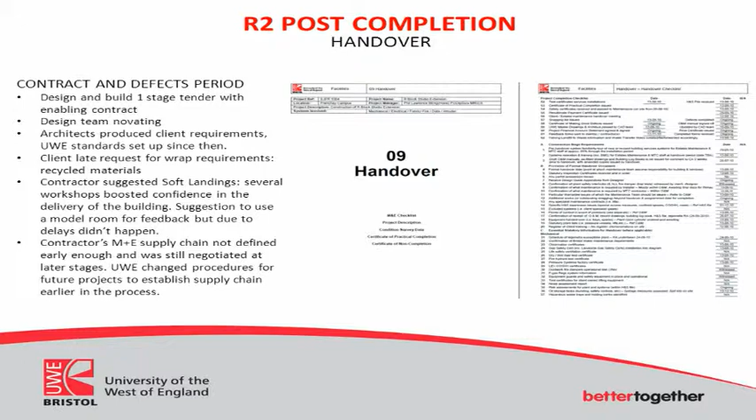It's safe to say the contractor and the consultants were asking us quite early on what we required. We have documentation about what we require generally, but there were gaps. They asked us quite early about what our O&M structure should be, and we weren't able to tell them then. Even at the end of the project, due to various processes, we weren't in a position to resolve that.

So these are things we've recognised as a client that we've needed to raise our game to aid the process. Building documentation - unfortunately that picture is of our cupboard where we keep our O&M manuals. Not particularly proud of that, and I've since got one of our girls to relabel and reorganise it all. But it really demonstrates the difficulty of maintaining paper-based O&M manuals.

An issue we have is we don't have O&M manuals for a building wide, we have it project by project. What we're hoping is that with BIM we can get more towards a building O&M, and then the contract O&Ms update the main building O&Ms.

So the reality is we've got electronic versions of all our O&Ms, which are probably more reliable than our paper copies. But at an estate of this size, it's very hard to maintain and control your O&M manuals.

Andrew explained that this building was designed through a Revit model, and on completion date we received that model. That model has been sitting since 2010 on the S drive, and only now are we starting to see the benefit of having these models for the estate's portfolio.

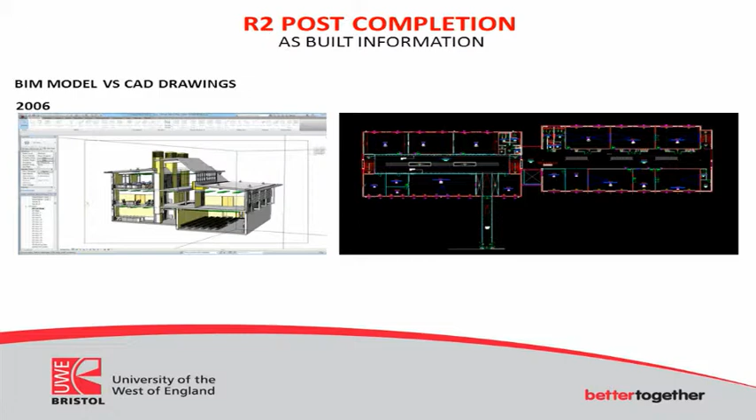I'm showing here an image of the current model that we hold, but all the operations and maintenance is done through CAD - all the CAD information is exported from the model, and what we currently use is CAD drawings.

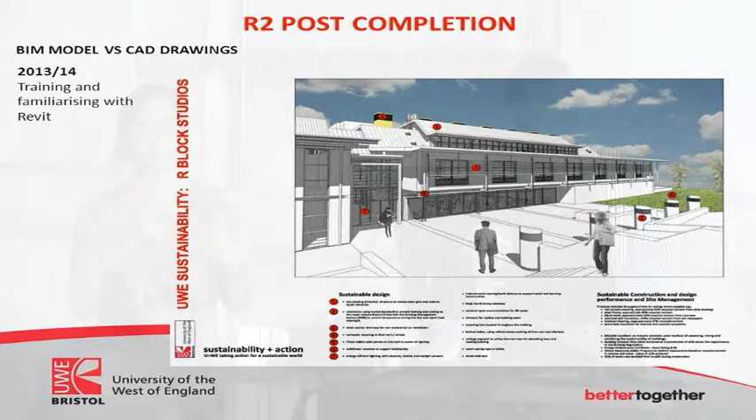Other uses we've given to the model are to create 3D images to help either on education or for the sustainability group, creating posters for students to know about the sustainable features the building has.

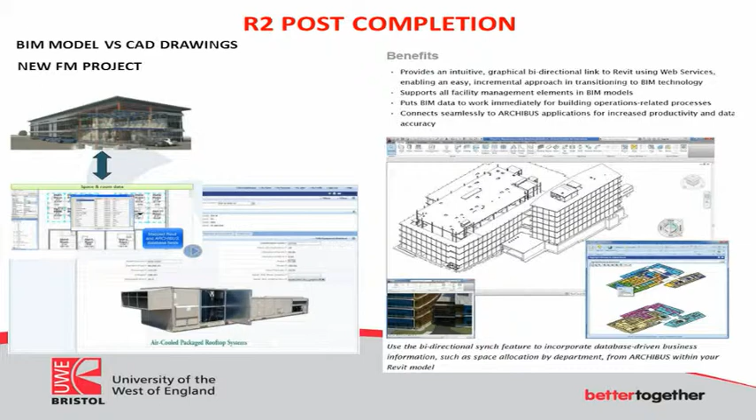In the future, we're planning to run a new FM system that is capable of linking to BIM models. The idea is that this FM system can bidirectionally link to the model and have the data sitting within it, managed from either the FM side or from the model.

So that's something we're exploring at the moment, trying to get to a position where when we receive a new model for a new building, we're able on day one to receive the key, all the documentation, and have the model connected on day one to the FM system.

Now, energy performance. Hi everyone, thank you Simon. For those who don't know me, my name's Fabia and I'm the energy manager here at UWE.

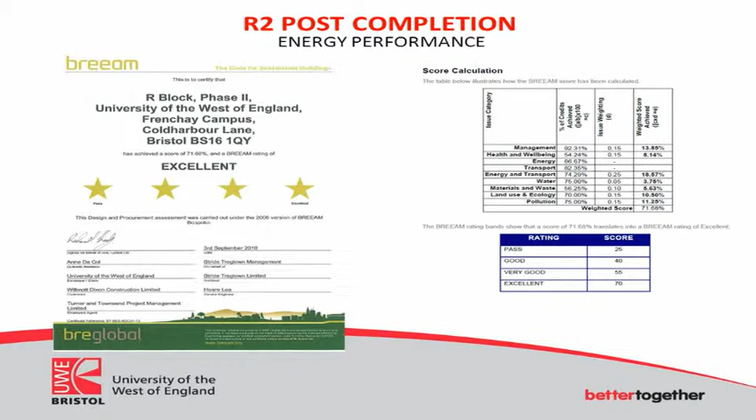So what I've got here are a couple of slides on how the building's actually performing in terms of energy. As Andrew said, we got the BREEAM excellent rating - there's that certificate on display for students and staff to see what rating we got, and the breakdown of the different areas we were awarded it in.

But for me, the most interesting bit in terms of energy is how did our EPC - the Energy Performance Certificate, which gave it a B rating - perform in practice, and what's our DEC rating, the Display Energy Certificate. If that's new to anyone, typically I'd expect my DEC rating to go up, meaning we get a worse performing building in reality than what we predicted.

For the last 3 years, since it's been built, we've had a DEC rating of B and 35. So that's actually achieving what the EPC rating is. I don't know how you've done it, but it's actually gone against the grain in some ways.

The interesting and challenging bit from the energy manager's point of view is to work out not just that it's working fine and we can forget about it, but how else can we improve it and fine-tune it. Because even though this building is working well in terms of energy, there are still some issues we need to unpick and resolve, because it could be working so much better.

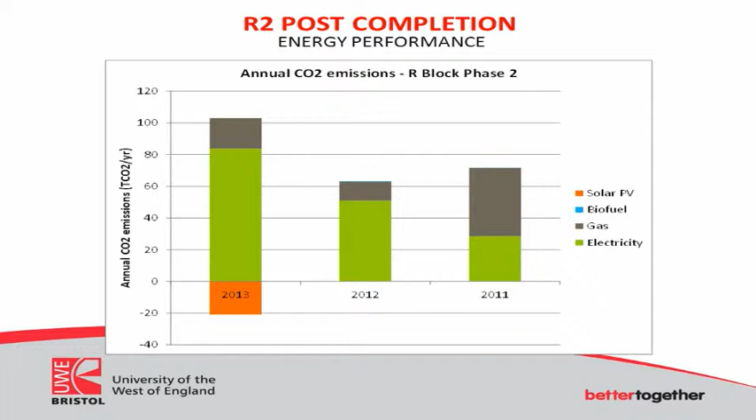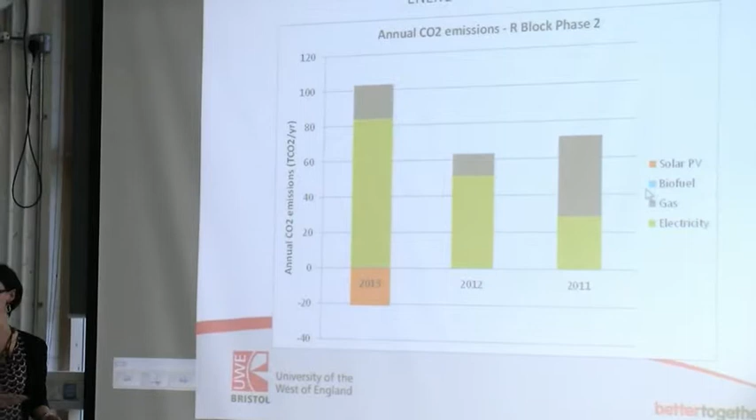That's really all I've done to adjust it. So what we can see is that our gas, the grey bit, goes up if we're having issues with our biofuel boiler. You can barely see it, but there's a little sliver of our biofuel boiler there. When that starts working, our gas demand obviously goes down. So that's a really good one for us - when the biofuel boiler is working well, it means we're not using the gas.

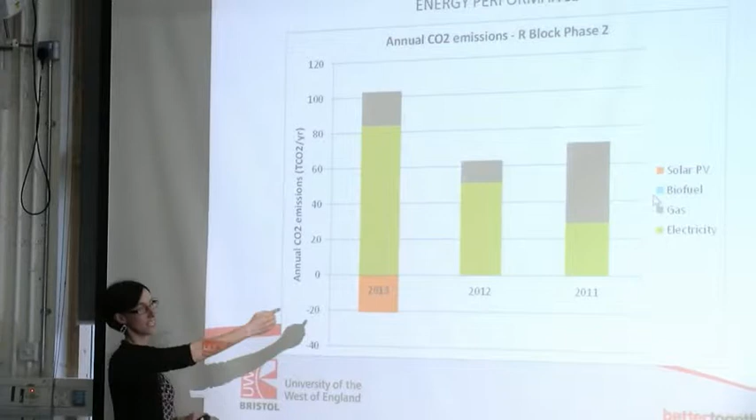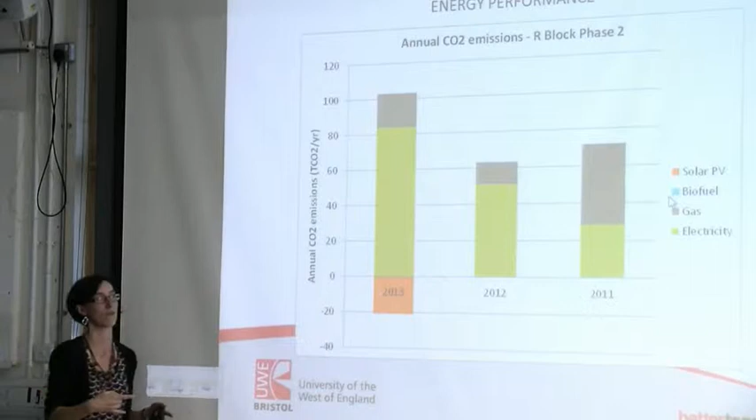The one which is slightly worrying in my mind is the electricity. You can see year on year from when it was built to just last year, we're increasing our electricity use. This chunk here is the amount of electricity we get from our solar PV, so the total electricity we consume in our block is the green plus the orange.

This is one level of understanding the energy use: electricity, gas, biofuel, and the solar PV. We can see how the energy goes into the building. But if I'm trying to understand how it's actually used in the building in terms of lighting, cooling, PCs, that's when we need a better level of sub-metering.

We've got the sub-meters actually in the building, but what we haven't got is them connected onto our AMR system, so they're not being logged. That's a lesson we've now learned - we need to start designing that element into the actual project, so the moment it's being designed and built, we connect it into the AMR system. It's got the capability of giving me more transparency on how the building uses energy, but at the moment we don't use that.

BIM is one way that, in my mind, in the future could help us start to join those gaps. We could start to use the BIM model to understand where energy is used in the subsystems or on different floors.

And then when I get the actual sub-meter data, I can start to bridge those two gaps. I think that was kind of all I had on these slides, but there are other thoughts as well, but we can have that in the discussion, yeah?

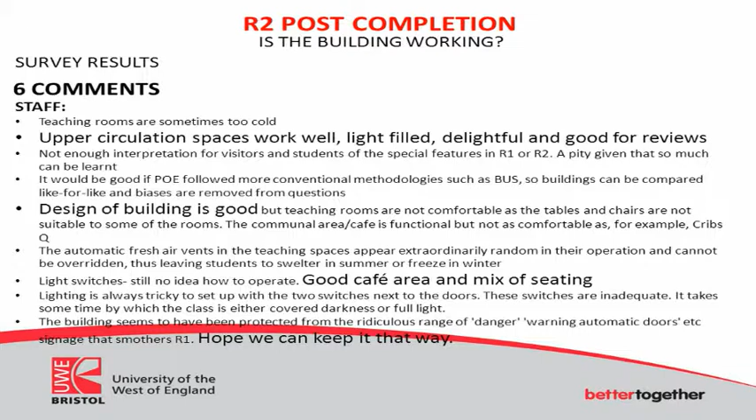In terms of the negatives, there were some issues with ventilation, and some issues with lighting control, having two controls next to each other and probably not understanding what works what, taking a bit of time to understand how it works. From facilities, same thing with ventilation, and also comments about how having exposed services on display will aid the education of students.

Now, in terms of maintenance and operations, there's some positive comments as well. I try to put that into highlighted texts so people don't feel it's a situation of blaming, it's just so we can learn in the future how we're going to deal with this. So, heating system works fine, ventilation system works fine, summertime temperatures are good, the building is cheap to maintain, and ground mass ventilation is good.

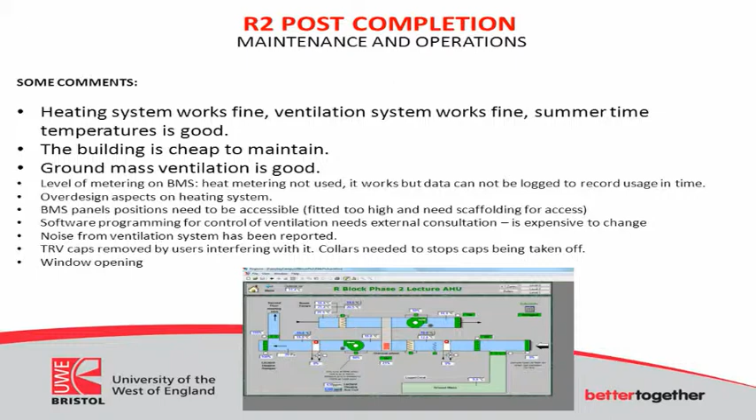There were some issues about the metering and BMS, same thing that Fabian mentioned, that you can see the readings of the BMS but you cannot access all the data that's been recorded by those systems. So you cannot build on what's happened before, because the software is not programmed to record past data.

Again, the comment on software programming for control of ventilation needs the support of external consultation, so it becomes an issue of then we need to spend extra money to get this software reprogrammed for something that maybe we as a client needed to pick up earlier on.

There were also some comments about noise from the ventilation system that has been reported, and because of the issue with ventilation, we found that users want to control the environment, and some of the caps on the heating system have been removed because people try to fix the situation themselves. So we had to add extra collars to stop people taking the caps off.

Then on cleaning services, we had some positive comments as well. There were a few comments about not having a proper cleaner's room, and about the glass being difficult to clean from outside. But generally the comment was that they're happy to work here, and they like the natural light and the big open space.